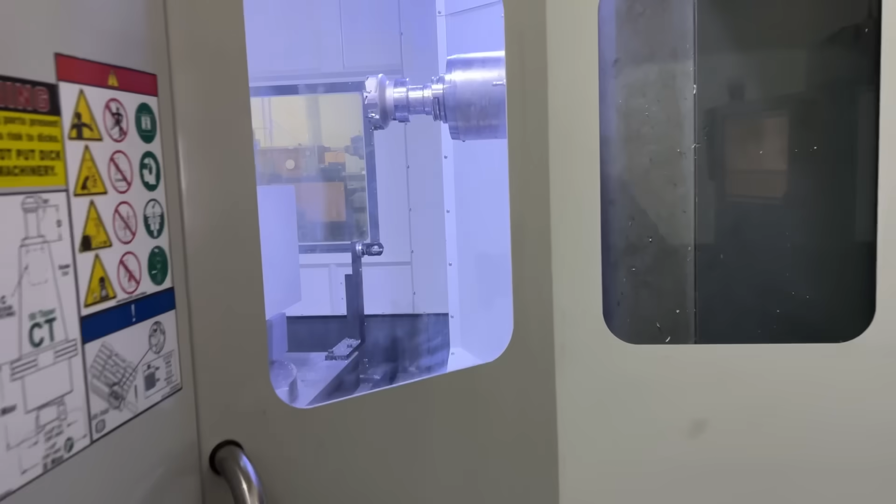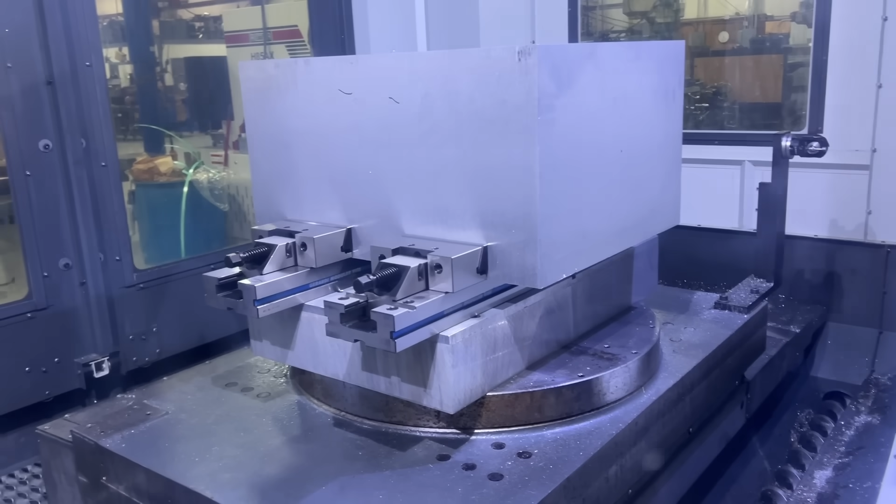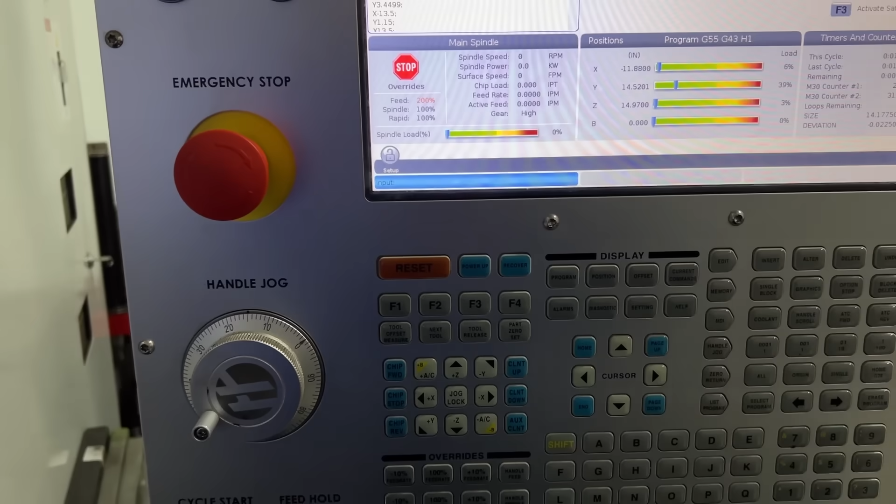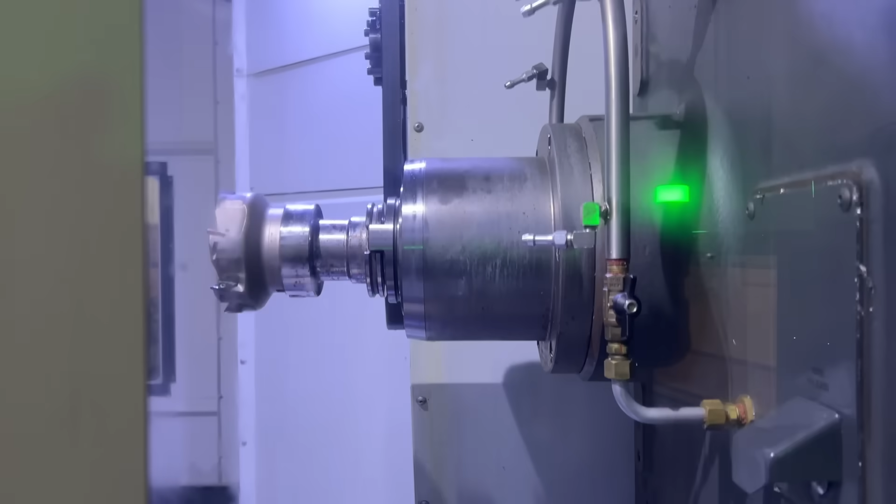Oh buddy. You are witnessing history right here in the making. There's a lot of stuff going on here to get to this whole point of just facing this block. I know there's a lot more, I know it's not all that exciting, but to me it is.

Dang, they're cutting 200 at a time, looks like. I feel like hitting the windows with the chips, I'll blast all the paint off it.

Now he has, Rock here, has run that drill bit. Look at that big bad bugger go through, and it sounds terrible. All right.

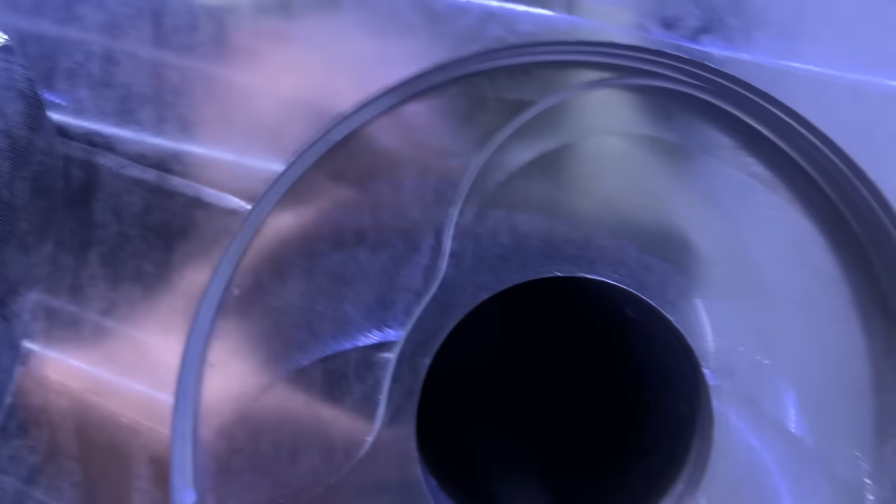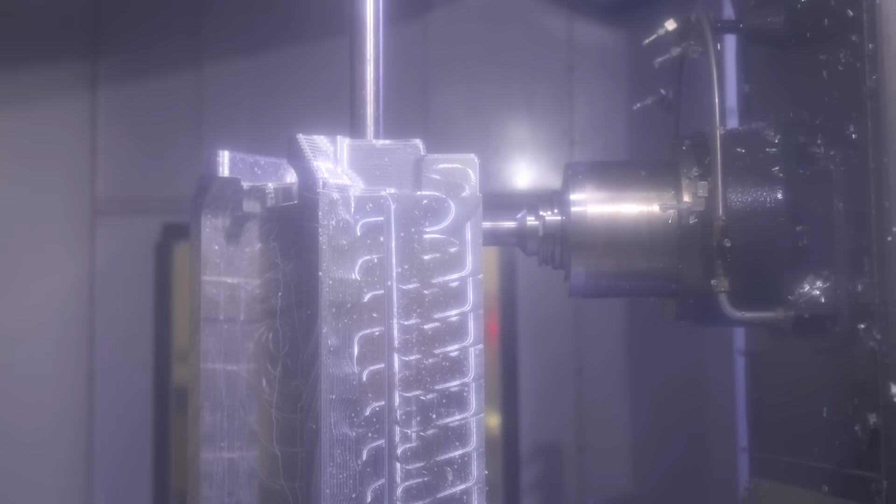Wonder what that was. That thing bores a hole like nobody's business. There's a problem, son. That material's not supposed to be welded to the tool.

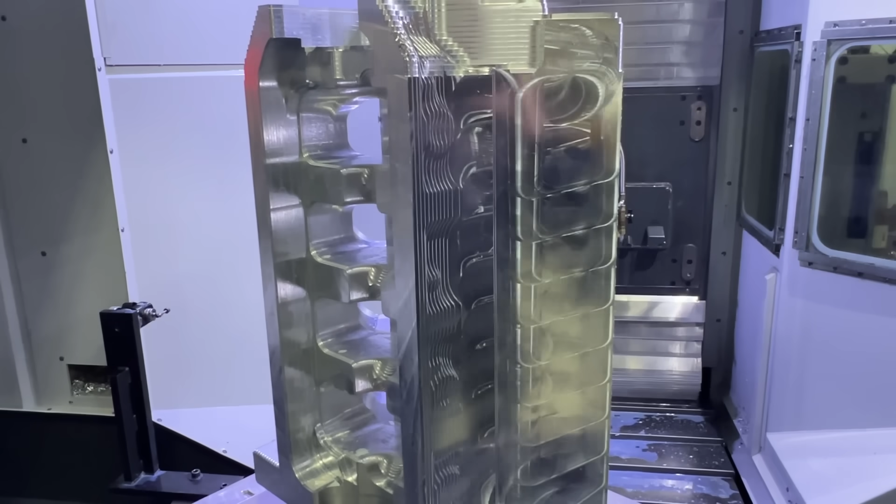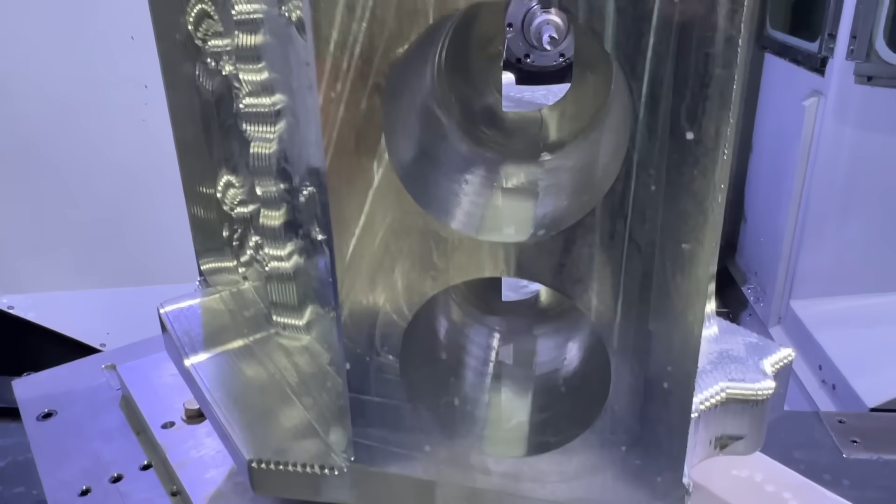Alrighty, now you have the finished roughing piece. So this is going to heat treat. You can see the very thick, super thick material here. You can see the bores aren't all the way through. Don't need to put a head bolt pattern in it, don't need to do any of that kind of stuff, which is going to allow us to now send this off to heat treat.

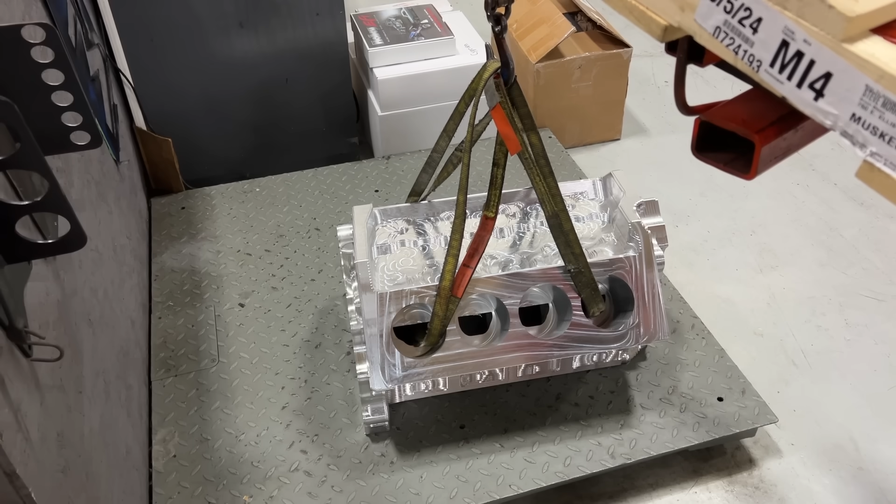That is 530 pounds of chips. That is astronomical. That's amazing, the first block back from heat treat.

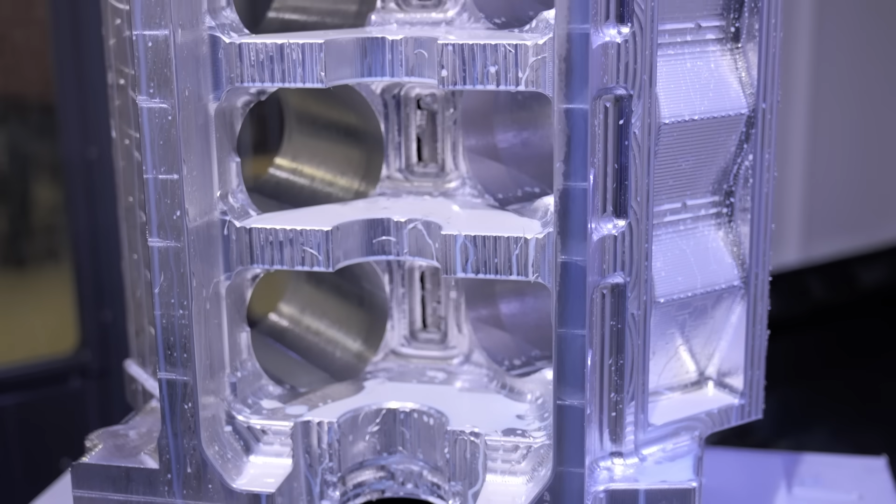So this is still rough. Right, that's the only thing that's finished. Don't hit it with a fork. Don't touch it with a fork, you're going to scratch it.

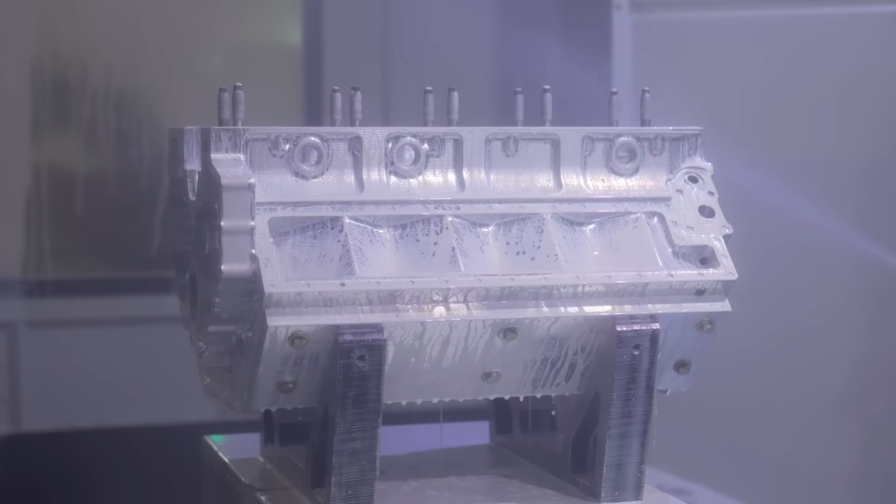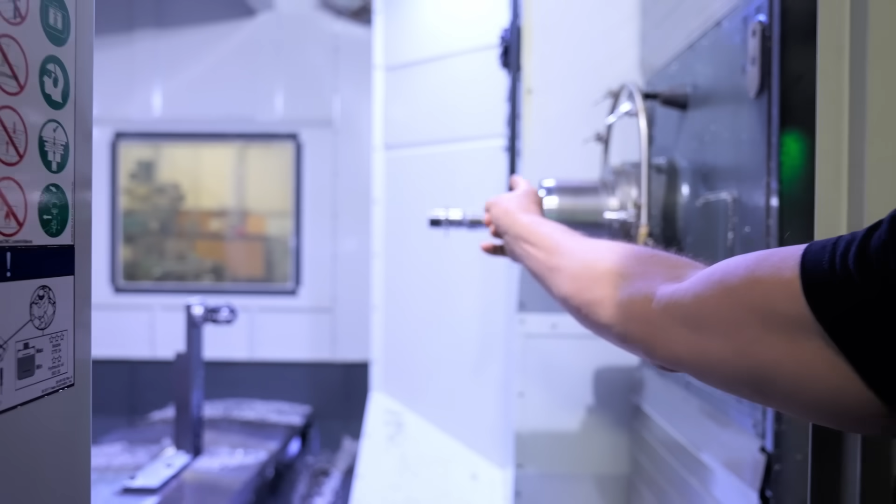Alright, so we're here, very close to finishing up, and this machine put the block in the other one. I thought you'd get a kick out of this cool looking destruction tool, so to speak.

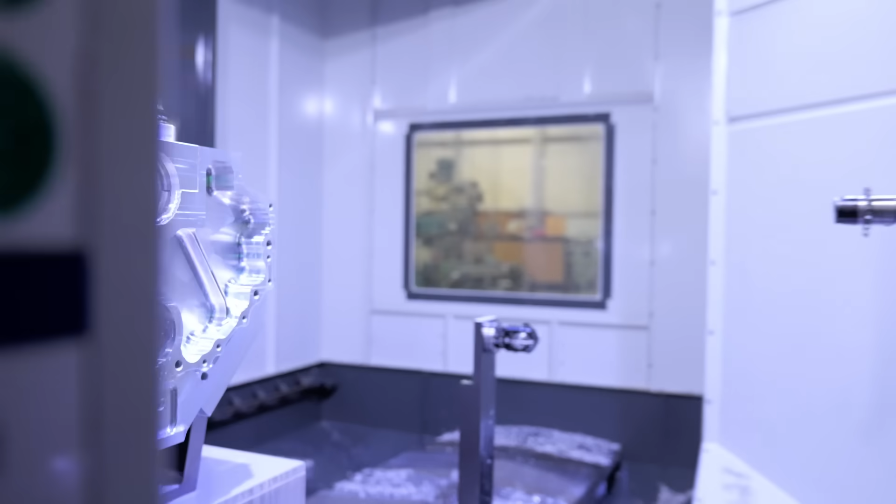Looks gnarly. So that tool is going in and cutting the rear main seal and thrust area. It's kind of neat, just cool machining stuff, and you already saw a little demo of the cutting through the main saddle. So the caps are made small, the block is made small.

Bolt together, make correct size, to line hole size. Same with the camshaft tunnel, so that's all done. We were getting really close, but I thought you might like to see how this thing all goes in with this.

What do you call that cutter? That's the saw tool. Saw. Sounds sick. Okay, let's throw that up real quick. So this thing's gonna be cutting a circle basically. You'll see it in there working.

Oh, it's actually cutting. It looks like it's cutting thrust side right now, right? Right, yeah, okay, the near side. Yeah. Just making little circles. Of course, you have to turn the coolant on after it starts cutting. Is it going to cut on this? Yeah, it'll start cutting here at some point in time. Yeah, there we go, go ahead.

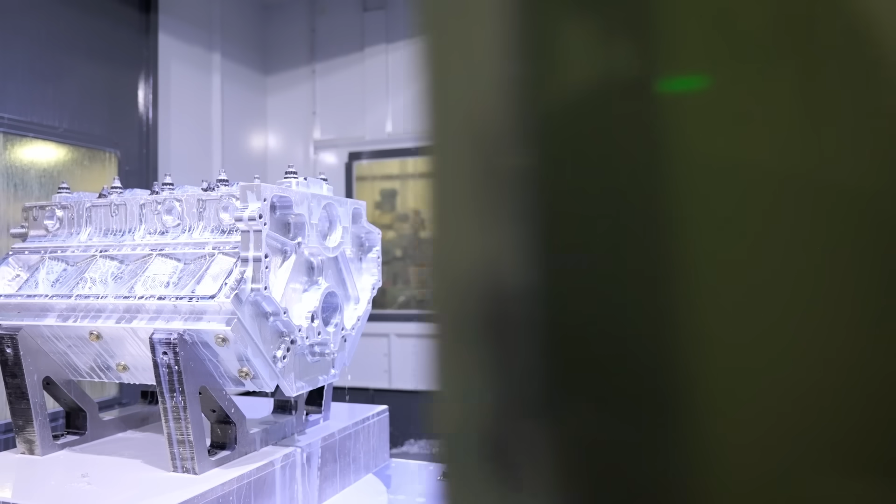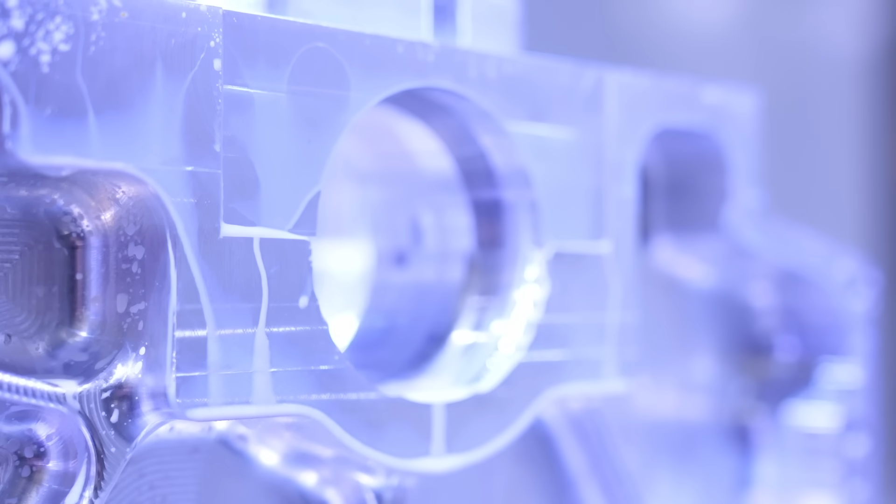So let's cut that back face of the thrust bearing. You have to go in with a different tool, the chamfer. It's not chamfered yet, so you see there's chamfer on the block side, no chamfer at all on the cap side. It'll all blend into it correctly, and we'll get to look at it once it's all done. So this is that chamfer tool.

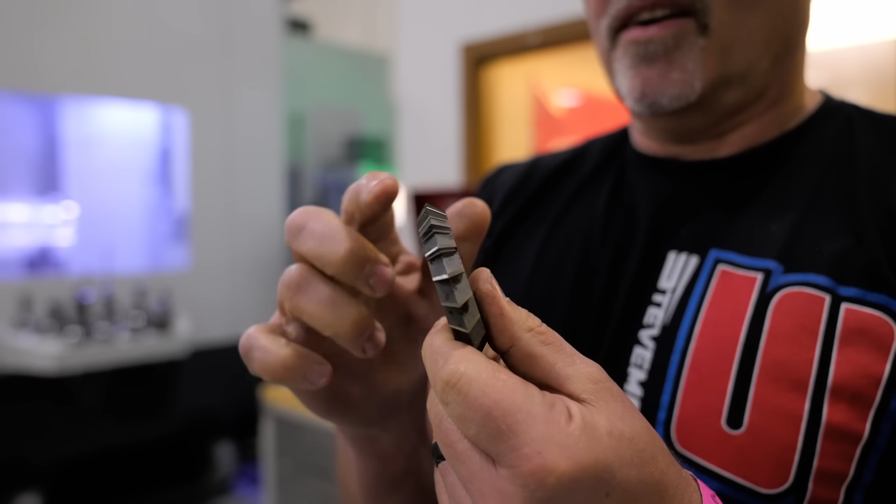It's the kind of sharp that you accidentally cut yourself on all the time, so I'm not going to fudge around with it too much. But that's pretty cool, gnarly looking. It'll just go like that and make that chamfer. So that's a 90 degree.

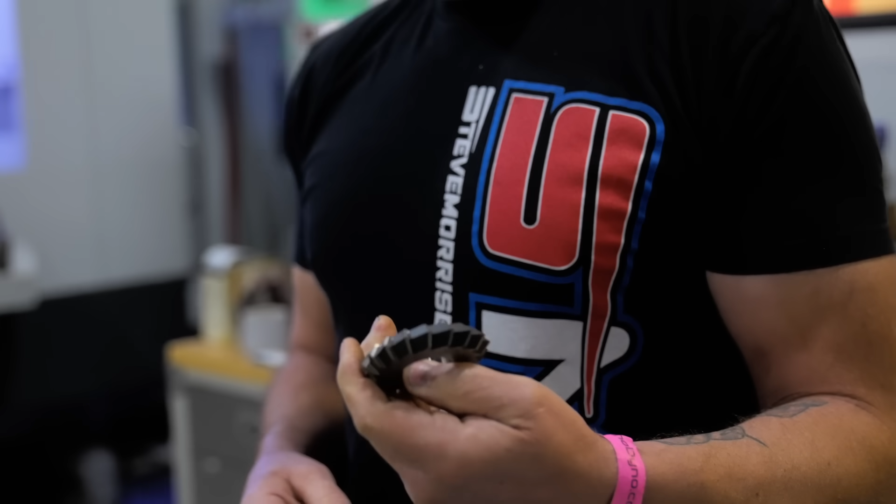Yep, okay cool. Alrighty, so now you can see it quite a bit more clearly. We'll go in here and run the chamfer. The chamfer, it reminds me of something. I don't know, well it don't matter. So we're gonna go in and we'll see that cut real quick.

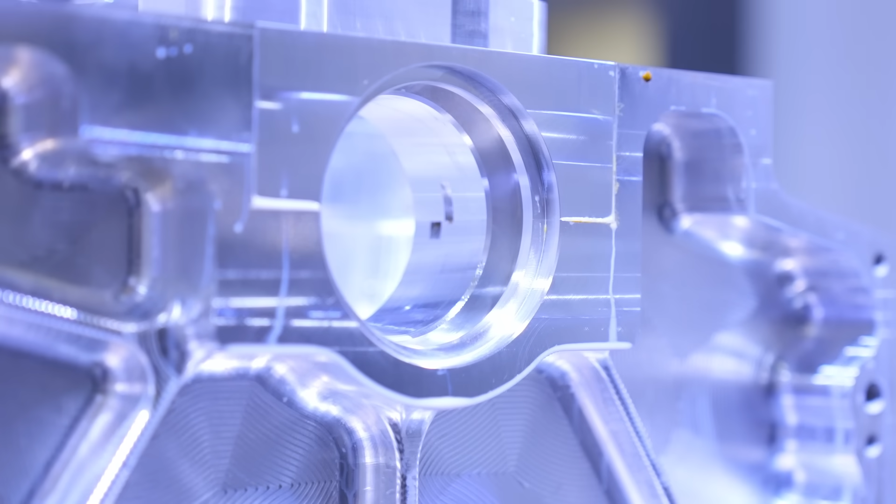It's actually all done, but we'll show you exactly how I did it. It must have plunged in, put it on the inside, and then cut the other side of it, right? Yep, oh yeah, this whole side is chamfered. So you already cut it, you can run it without coolant so you can see how that all works, because the tool is pretty cool.

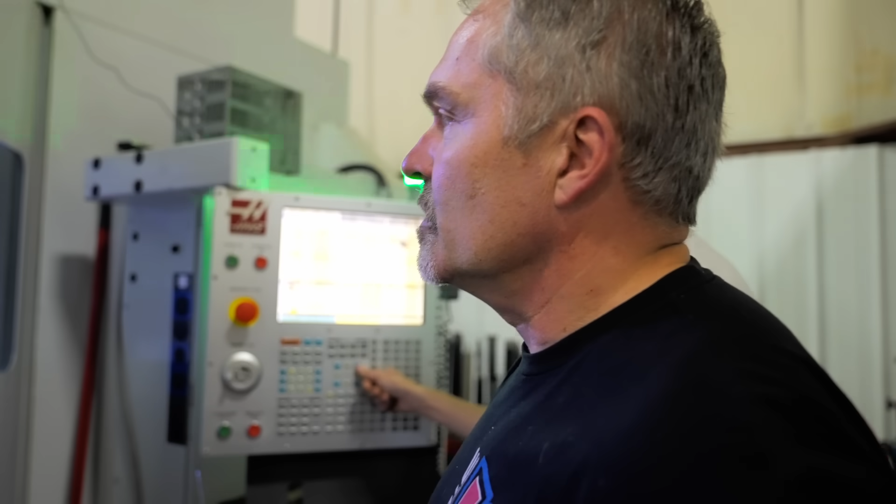Let me grab this real quick. 3, 2, 1.

Right in the very center of the door. You can't ever see the freaking tool. Yep. Make the doors offset. Yep, one bigger. Yeah, that's what they should have, an offset. That makes sense.

Scary retracting tools. Tools retracting are scary. But alright, so this thing is ready to come out, right? No, heck no. Close, very very close, okay.

So we got more left to do to it. We need to mill the dowel locations for the belt housing, and then undercut the cam tunnel. Oh yeah, the real fun stuff. So dowel pin, that doesn't really matter, that's no big deal, but the undercutting the cam tunnel, I'll show you, it's going to be interesting.

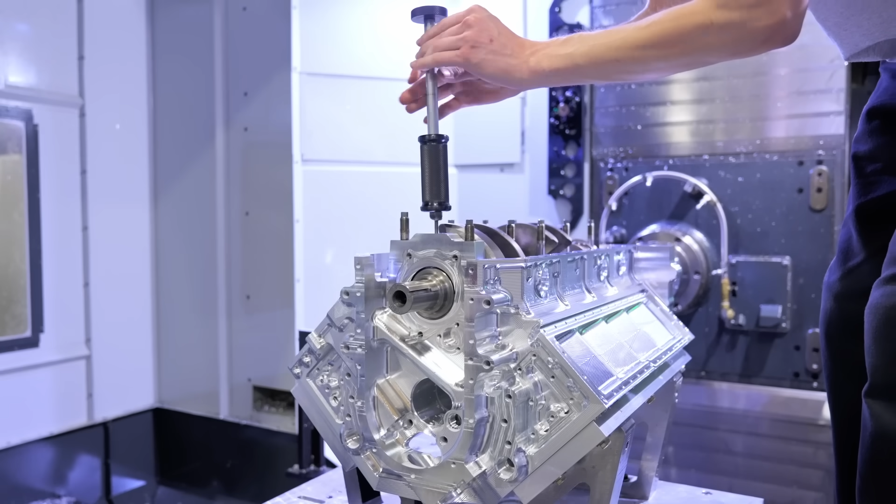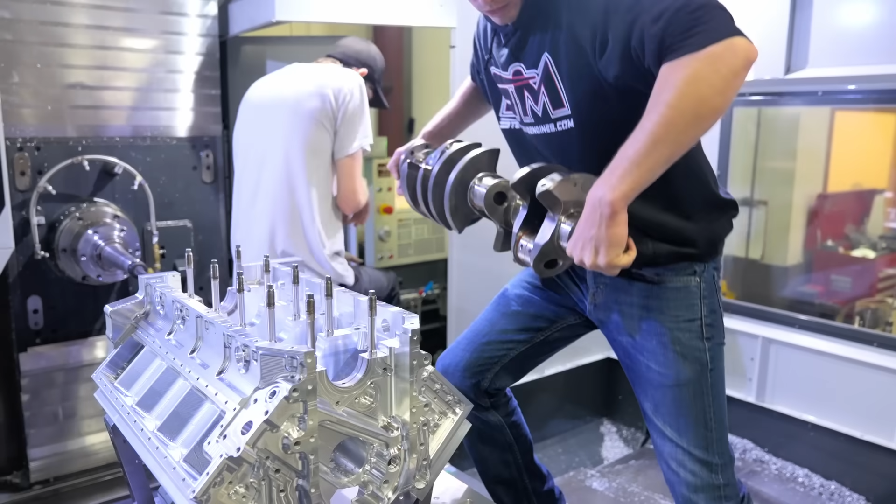Careful, slippery. That would suck to slip and fall with this thing on your knee. You just love showing people how strong you are, huh? This one doesn't weigh 100 pounds, I promise.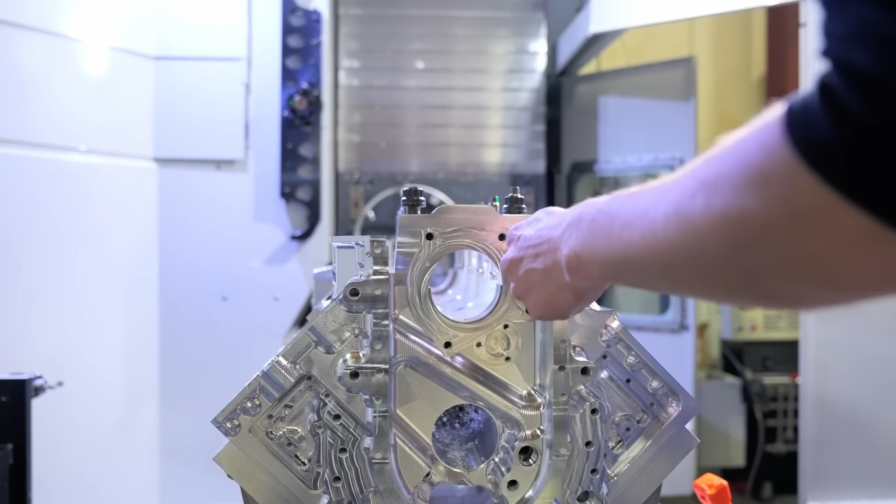Now that is really located. They're located on the studs, and it's a nice tight fit in the block, which is really good.

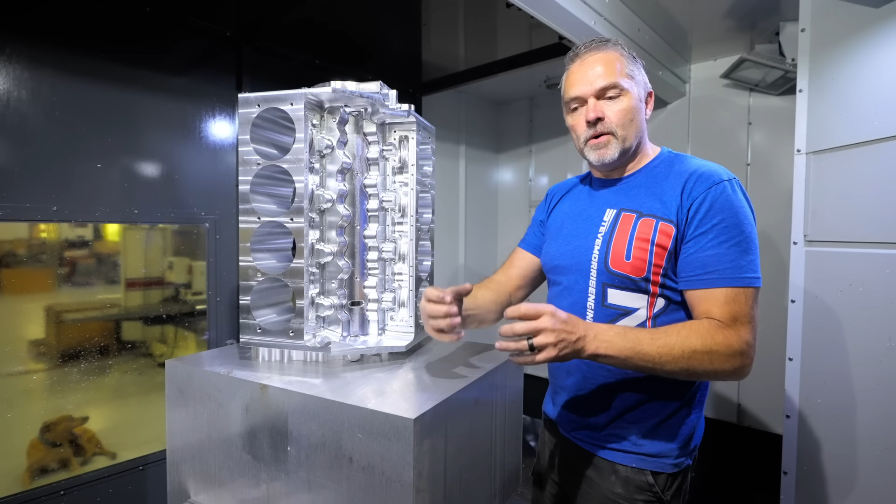All right, now you've seen how we done everything. The block's sitting up here. Now this block is gonna go into the big centroid after we do a final line hone on the cam tunnel. So the cam tunnel and main tunnel are perfect. They're in line and square with each other, and square the world.

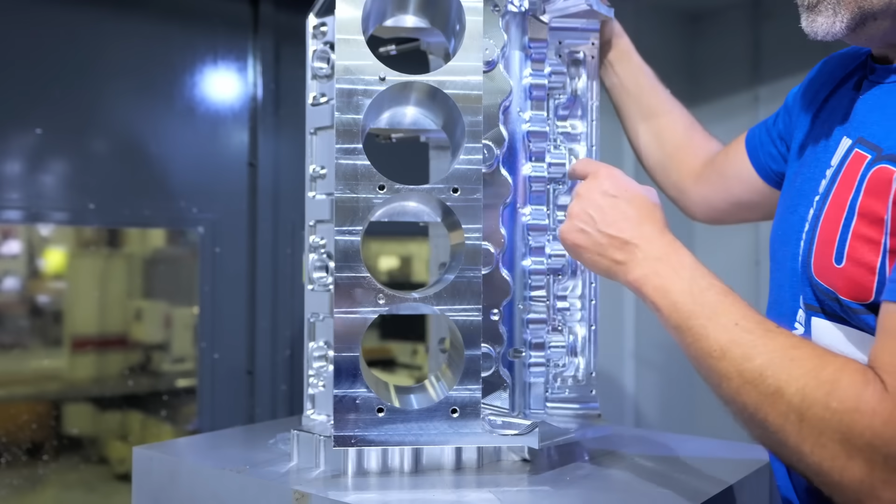So now we'll put it over in the centroid machine, because that machine only indicates off of the crankshaft and camshaft, and everything is rotating, so we don't have to do any 5-axis work over there per se, but it will be very good to do final bores, head bolt holes, lifter locations, and actually I think that's it. Basically it just finishes off the top stuff that would want to be perfect off of the camshaft, crankshaft center line. So that's why it's going to go over there.

Now, just to keep you guys in mind, everybody asks how many hours you have in this thing. This is ironic because today, the very first video we put out on this thing was almost exactly 2 months, 1 day away from being 2 months, to get it from this block of material to this block.

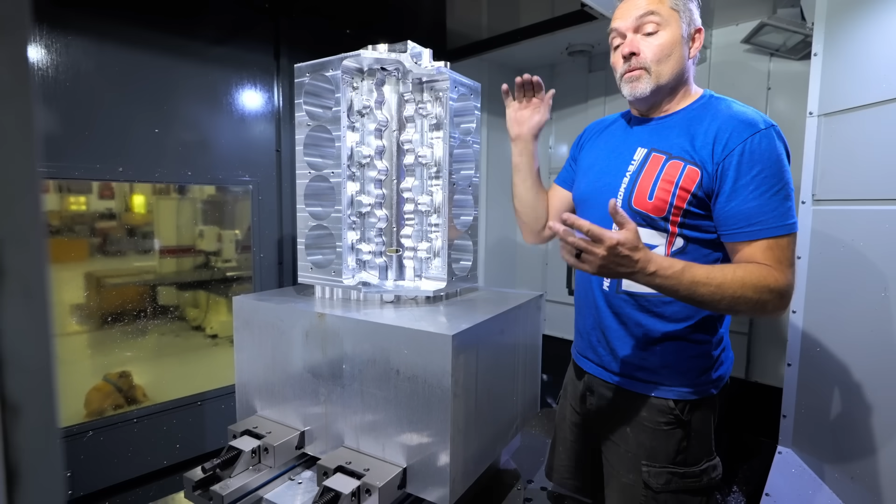What we're doing is, this is not as easy as you think. Even though this has been made before, we're making it now. We have to wrap our heads around it. We have to make sure that everything's all good to go.

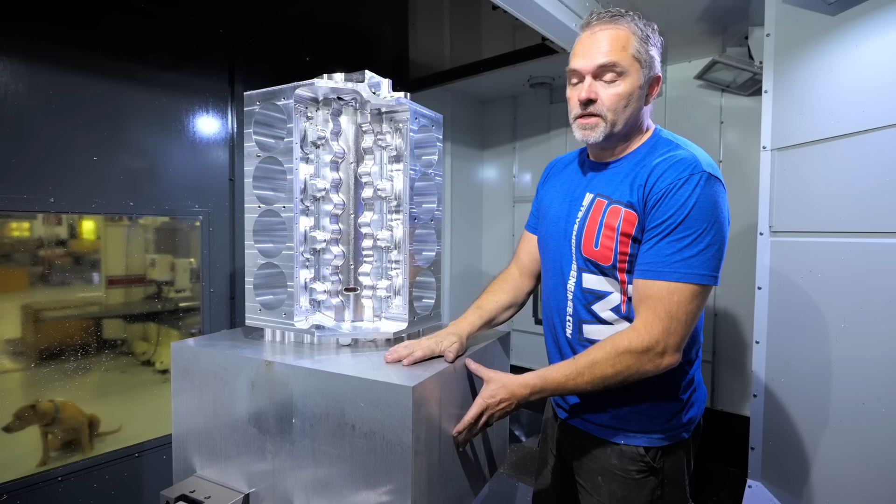Now this block is in the machine because it's going to start getting cut. Every program, every hole, everything has to be quantified, to make sure that it is in the right spot, that it is getting machined correctly, that we're not going to screw something up. It just takes a lot to go through this whole thing. And it's still not done. This is the first one that we have been making.

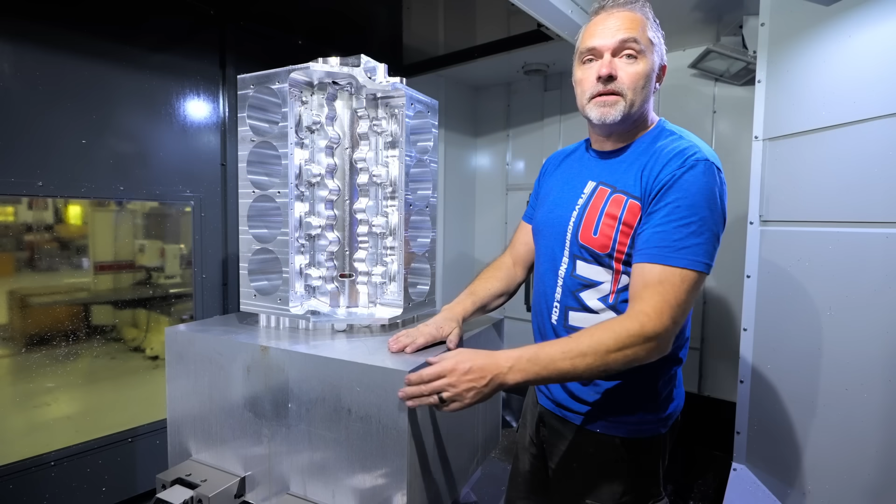After we make this one, we're hoping to make this much quicker. I figure, all things said and done, it is going to be probably around 60 plus hours per block to finish a block. Now that's 60 plus hours of labor, plus $3,500 worth of material.

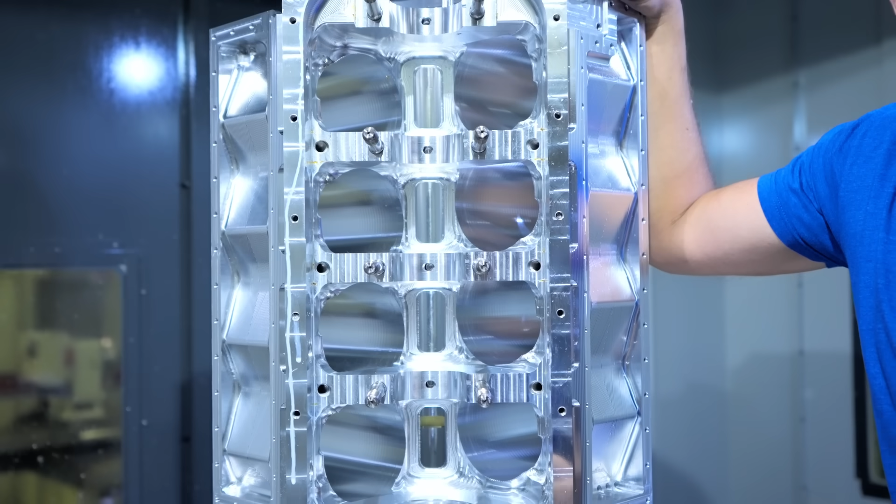These main studs right here cost me $82 a piece. The head studs cost me over $45 a piece. And the sleeves cost me $200 a piece. So there is roughly, all things said and done with material, studs, caps that we make here, sleeves, head studs, a finished assembled block I have well into...

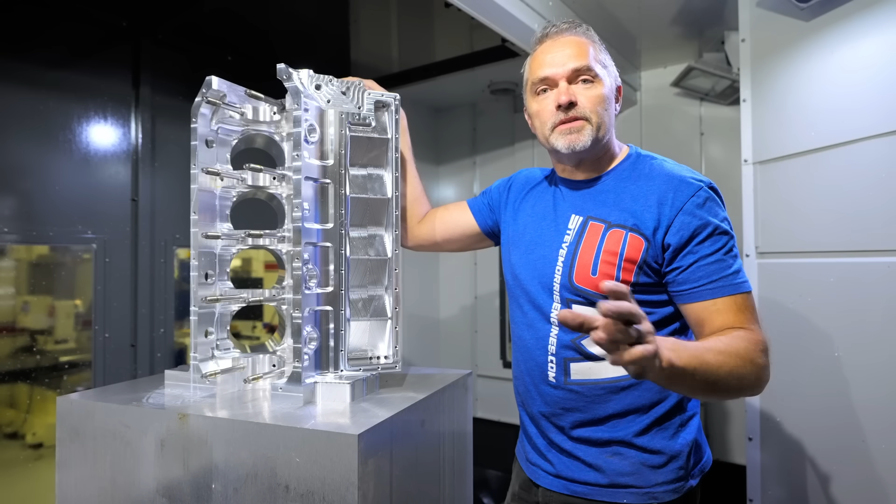This is not including labor. This is just material costs, well over $7,000 in material. Just material. So then you got to figure out where you're going to pay for 60 hours worth of labor plus, and machines and all this other stuff. So that is why these things are expensive.

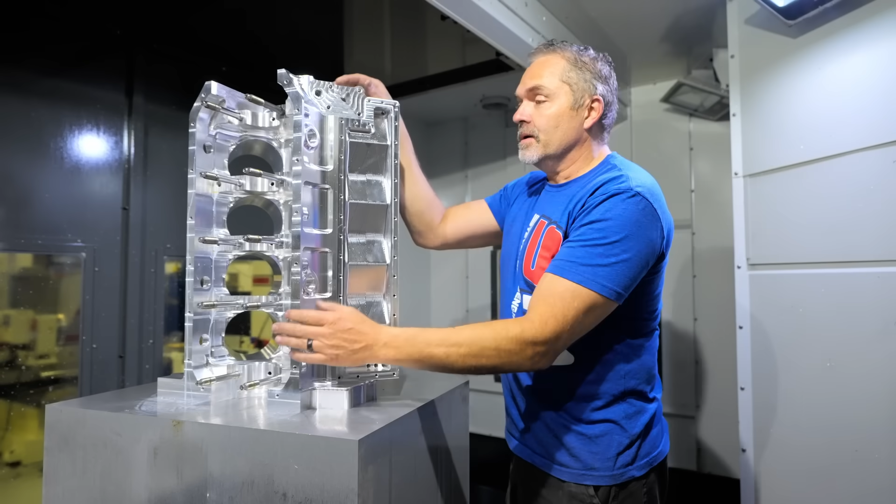That's why they're worth it. You can't cast something like this. No, you can, but there is not the technology yet to cast something like this.

So anyways, I'm getting really excited. I keep saying that, but it is getting closer and closer, and we're going to be at least cutting on block number 2. So that's cool.

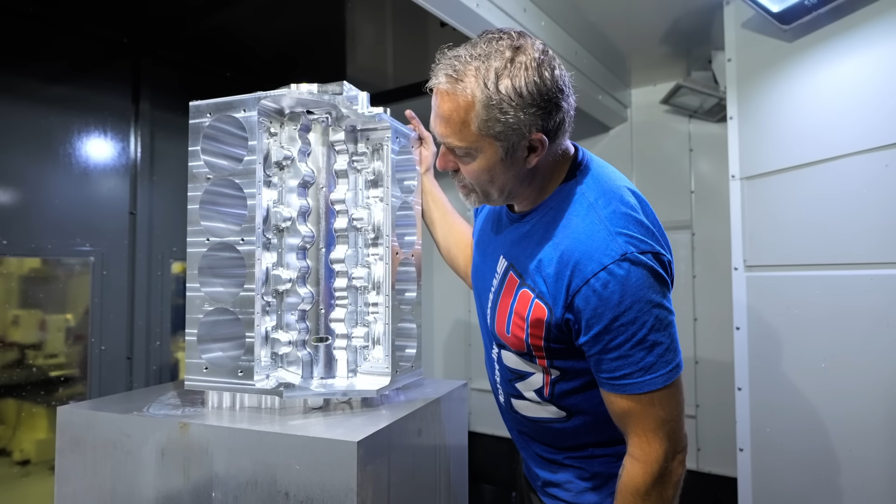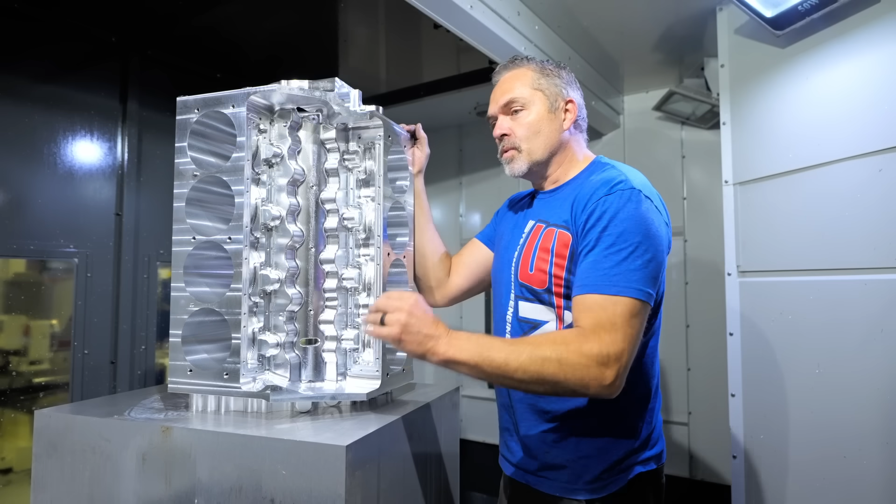And as we're finishing up the final processes on block number 1, we'll serial number it in here somewhere. Maybe we'll have to do SME1, or I don't know. I'll figure out some kind of good number for the first one that we built here. We've been making the heads already, but this is the first block that we built.

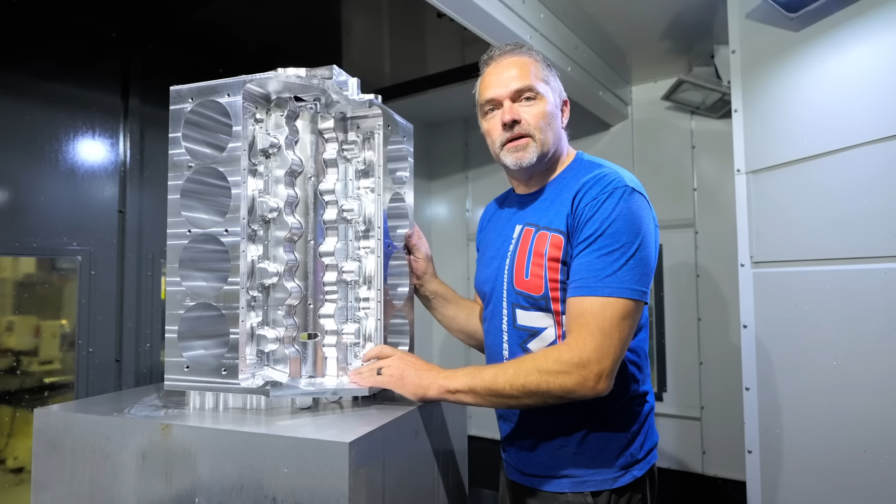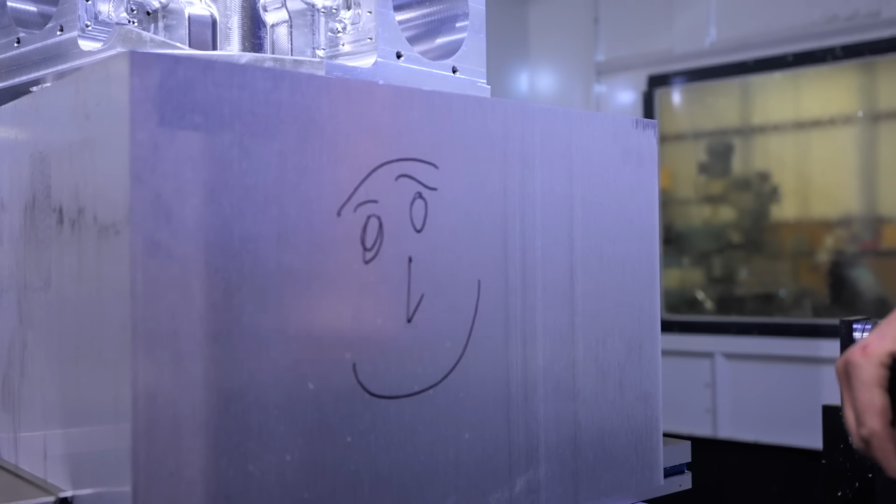Well, that's not good at all. There you go.

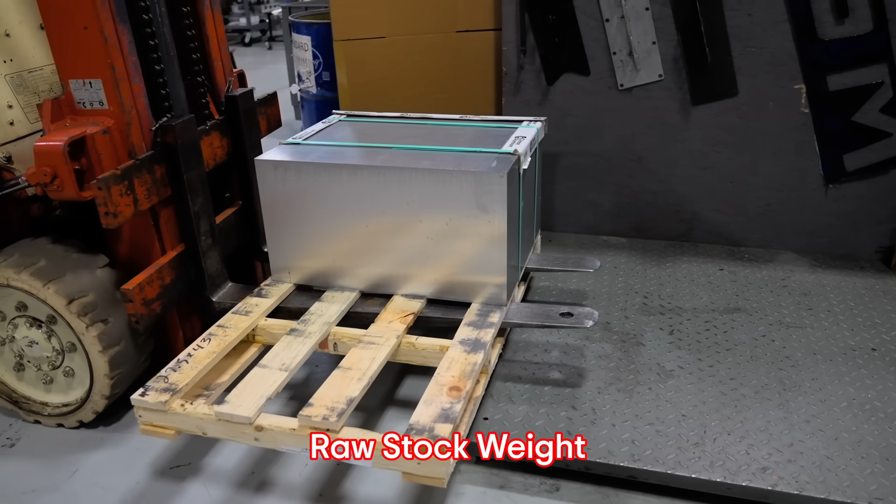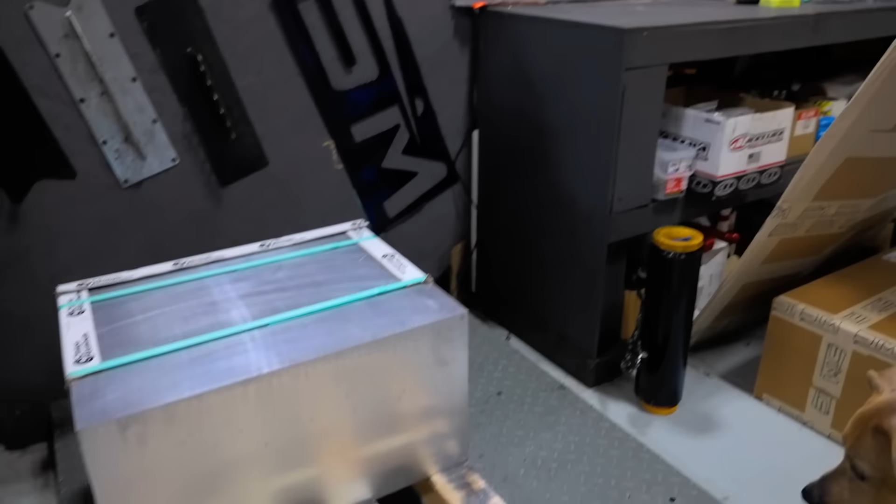798 pounds, and I figure that pallet weighs... what do you think that pallet weighs? Probably 20 pounds, 20 or 30 pounds. I bet not that one. That one's pretty light, that one's light fine. 20, yeah, we're just gonna figure 20 pounds. So 778 pounds. All right, pick that thing up off of there.